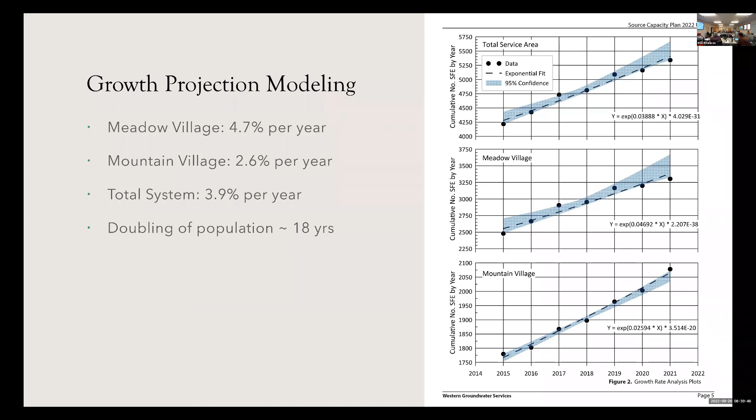There we go. So if you look at your growth projection, I just picked some 5-year increments. For the planning study, we used a 20-year period, so it went from 2022 to 2042. So at those growth rates, you're out to 12,600 SFE in 2042. That's more than a doubling of what you have today on the water side.

And the Meadow, of course, with that 4.7% growth rate, outpaces the Mountain considerably. So most of the growth would be in the Meadow. The Mountain also would see significant growth over that same time period.

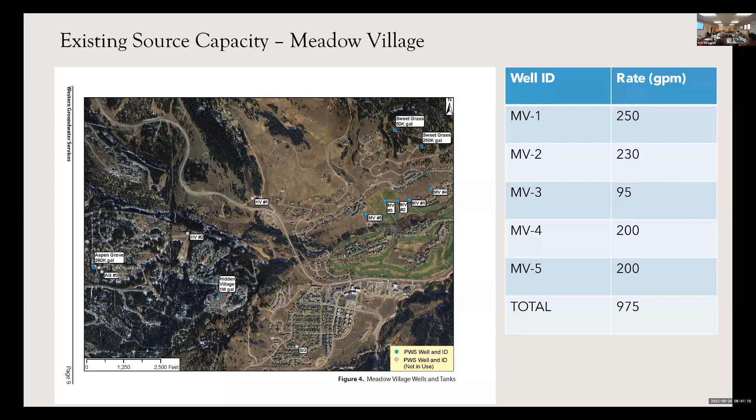In terms of supply, this is the Meadow. You've got 5 wells in the Meadow now. So 975 gallons per minute is that supply, and you might keep that number in mind as we go through. Right now you're using only about 2/3 of that supply. Your max day in 2021 was about 590. We'll go over that some more.

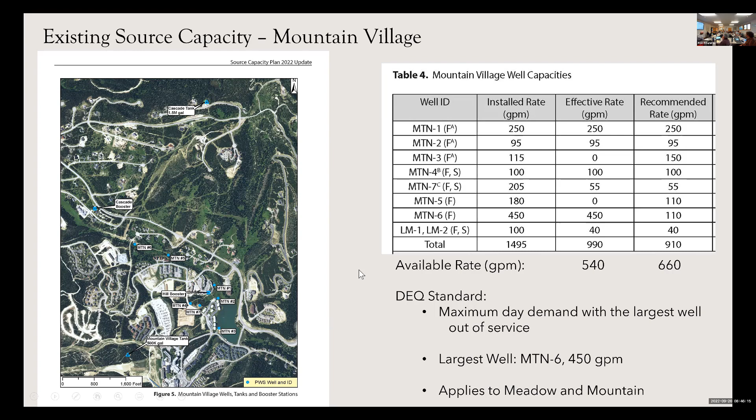Now what happens is when you treat 3, 5, and 6, because 5 and 6 can't sustain the high rates, you're not going to treat for those rates. So you're going to knock those down, and you can see I've got them at 110. Well, at that point, Mountain Well 1 becomes the largest well in the system. And so we're taking 910 gallons per minute total minus 250. That's how we get to where we get. And it still acts as the largest well down into the meadow because the meadow doesn't exceed 250. They match it. So that's kind of how that works out. And we'll talk a little bit more about 3, 5, and 6 on some subsequent slides.

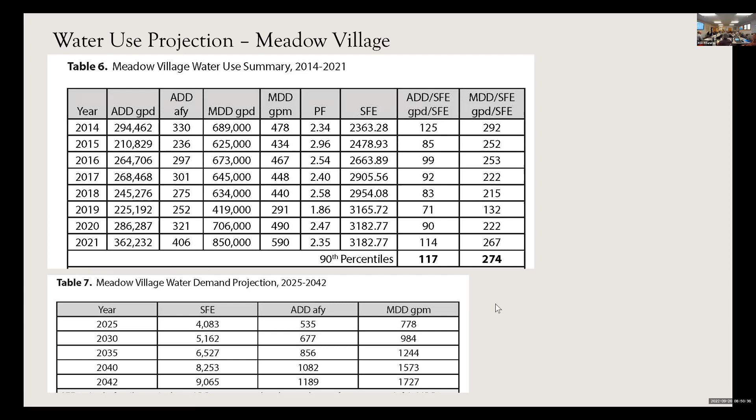Yeah, and actually, meadow, when you look at these columns here, it's fairly consistent over time. I mean, there's certainly some wiggles in there, but the numbers aren't wildly different. The mountains, they are. We'll look at those. But anyway, that's the number to remember: the 2030, 2032 horizon based on the present growth rate. That's when the meadow supply wells are going to be maxed out. But that doesn't include the subsidies that they get from the mountain. Right. So the mountain is key to subsidizing that at this point. Yeah. Okay. There's supply side.

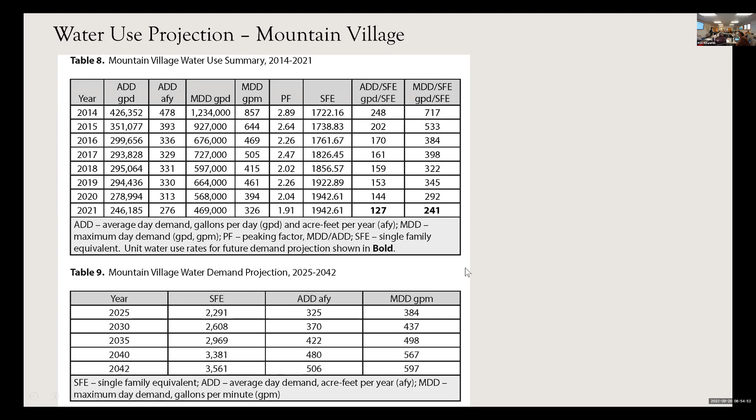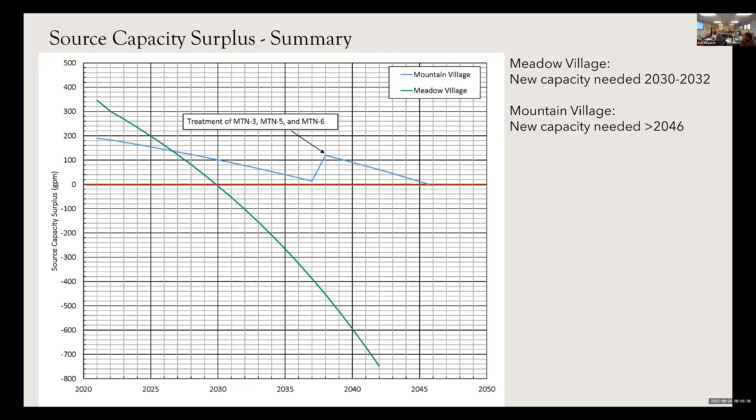On the mountain, here's your projection here. You add this new treatment in 2038, and you're good out to sometime just before 2046. That's what that plot shows. So just a summary. So Mark, real quick, you have a kind of spread out analysis over a 12-month cycle, kind of averaging over the year, but you have a prediction of in August.

Well, we work off that max day demand. I know, but we don't have a linear flow out of our system over the years, so, Jim, you could agree, but we should look at a micro month in there if you drain your tanks. No, you shouldn't. See, if you meet that max day demand, that's kind of your worst case scenario. Yeah, that's true. So you should be fine.

And the numbers I'm using, right? So on the meadow, I didn't get into this, but I had it noted on the table, I'm using the 90th percentile of the data we observed. So I'm kind of pushing you out to the high end. And then on the mountain, I did use the 2021 unit water use rates. Those were the lowest, but you may come down some more. So I think it's a reasonable way to go with that.

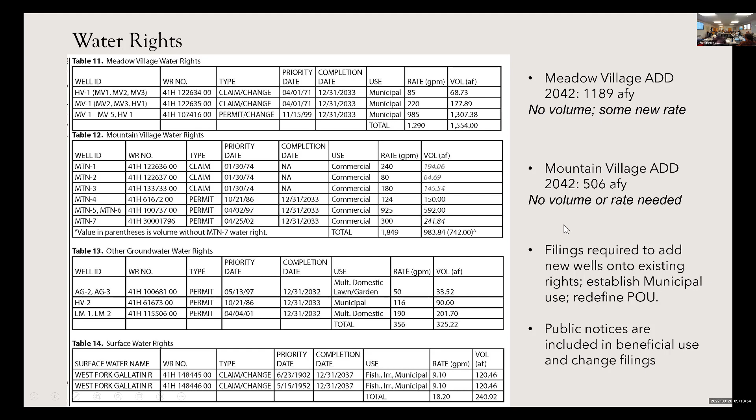So again, redefining of a term in a different arena, right? Goes back to rates, okay. Got it. Yeah, it's quite a broad definition right now. It's something like a place that's like a municipality. It's quite general. Which fit back then. Yeah. So, I've got a bullet on that coming up that would list those rights. In fact, we're here.

Okay, so. Oh, geez. Just thinking if I missed a slide. No. Okay. Well, so we came up with them. I came up with improvements.

Okay. So let me just preface this a little bit. What a lot of water systems and municipalities have moved to is integrated water resources planning. That's where you look at all your system and it's integrated, right? Conservation is one element of that. All your reuse, if you were doing reuse through the purple pipes and distributing that. Since you're not doing that, it's more on just the wastewater side. But anyway, I've got a few improvements here.

Conservation has been around for a long time. So what I did is I looked at what type of conservation would be the most useful to the district in terms of how you manage your source capacity and the longevity of what you have. I looked at Meadow Village and applied some numbers for almost a complete elimination of ornamental irrigation. And you save about 400 gallons per minute by 2042 with that. I've got another slide on that, so we'll talk more about it when that slide comes up.

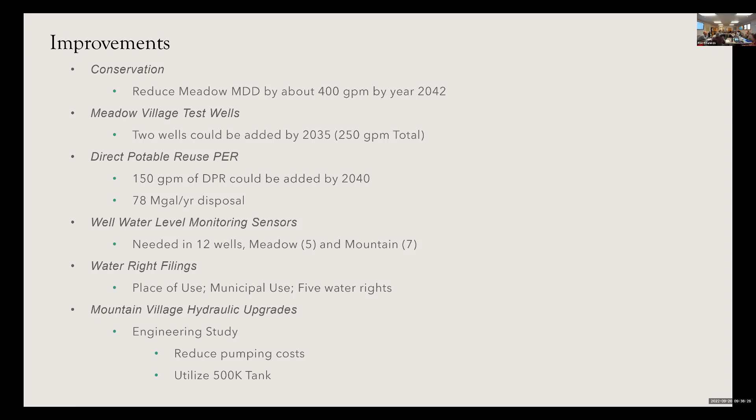Actually, the point that we of course didn't anticipate back then is we just kept going up the mountain on elevation from Montana Club. I never thought we'd go above Challenger. We did. We'd put a bathroom at the top of the tram if we had.

So here's an estimate of costs. Conservation's sort of almost free, but you're going to want to put some more thought into that. I've got a slide on it coming up, but basically those improvements I just outlined, estimated budget just under 500K. The sensors is the big one. The test wells, I have those as being done like 2025. You could defer them a little there. My thinking is find out what you got, soon, so in case you have to replan them. So it wouldn't be bad to do those sooner rather than later.

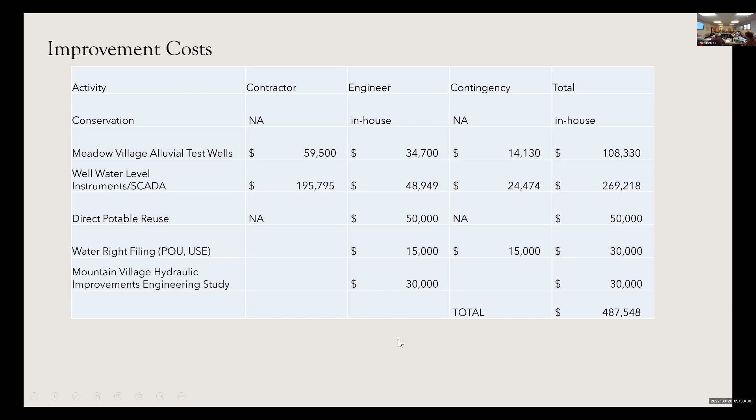But that's kind of a look at that, and that's of course in the report, or this will be an updated report. And here's just a timeline for you. Conservation, you can start it right now. The sensors, you might distribute that over a few years; I'm just showing you 2 years. The direct potable reuse, that's just an engineering report, to just move that ahead. The water right filing, you could do that next year, and then same with this engineering study. You can do that anytime and get those things to move ahead.

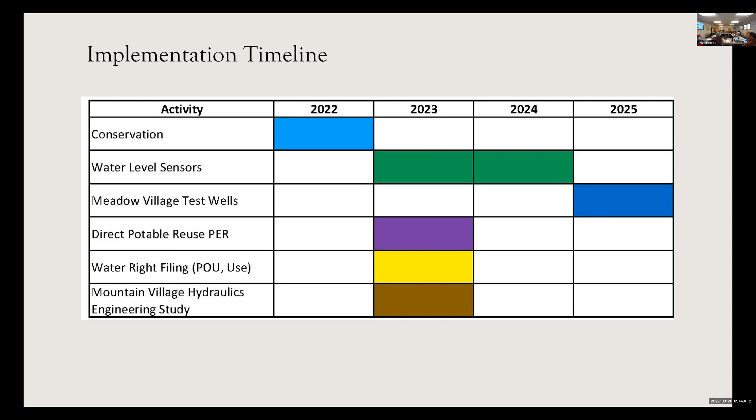So the irrigation conservation is kind of interesting. It's been around for a long time, right? Well, what I see when I look at it is these voluntary and incentive type conservation measures, rebates, et cetera, they really don't do much for your system. If you could ever get 25%, that would be great. What you see is anything from a few percent to maybe 15% participation. So if you really want to get something out of conservation, it's got to be mandatory. You won't get much out of it otherwise.

And the other thing about those voluntary programs and educational and so on is they actually take a fair amount of time, right? So you're engaged in that. The district participates with Gallatin River Task Force. They've got a nice website section on conservation, and if I understood them correctly, they got about a 2.5% participation in their program, and so mandatory is kind of the only way to really get anything to happen with conservation.

And some of the conservation literature advocates for this, 500 square feet irrigated. It can be any shape. I just show you that 22 by 22, but it's basically an elimination of almost all outdoor ornamental water. But the savings are pretty substantial. You recall that Meadow Village was about 274 gallons per day per SFE. That would drop you down to approximately 190 by my calculations. So that's something for the board to consider.

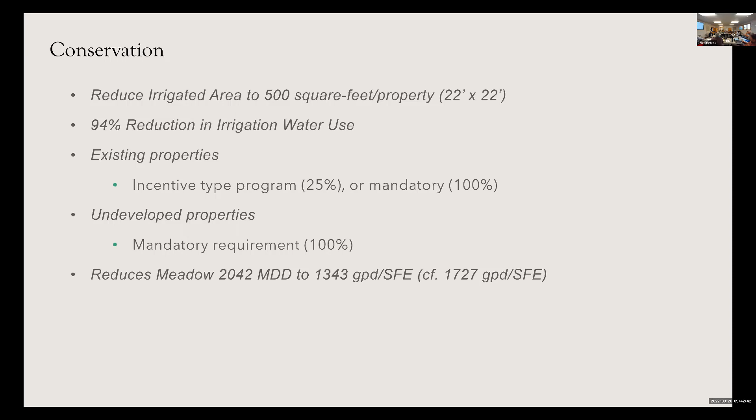And then I show you in that last bullet, that 1,727 gallons per day gets knocked down to 1,343. That's almost 400 gallons per minute. So that's a substantial capital improvement savings realized through that action. The sensors, here's just some numbers regarding that $270,000 cost. I threw Mountain Well 1 in, Meadow Well 1 in, so it's 12 wells, but there's the 8,050 feet. And of course, as Ron and Vince mentioned, there's other options out there; this is probably the status quo worst case you could come up with.

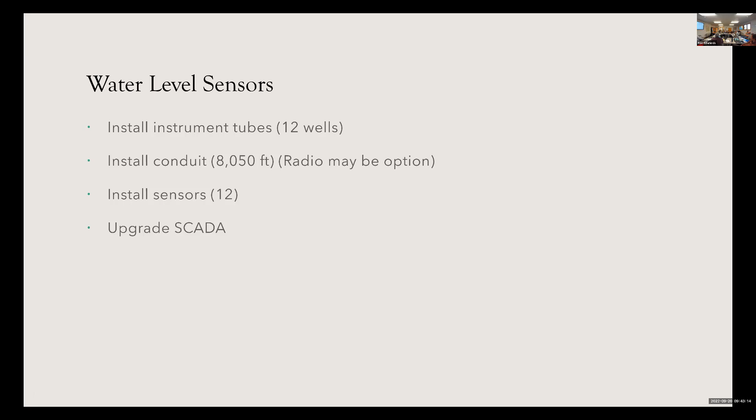Here's a plot of the test wells in Meadow Village. A little hard to see through. What I'm showing you is the colorful areas are the estimated thickness of the alluvium. So this white band here, where the existing meadow wells are, is kind of an anomalously thick section of alluvium. And so I'm showing you one of those test wells. I call it number 4 because we did test wells 1, 2, and 3 in the meadow years ago. And then here's another test well over here. Here's meadow well 4. So there's good thickness there. You're offset equivalently from the channel as the existing wells, which is important for the water right filing aspects of this. So that's where those are.

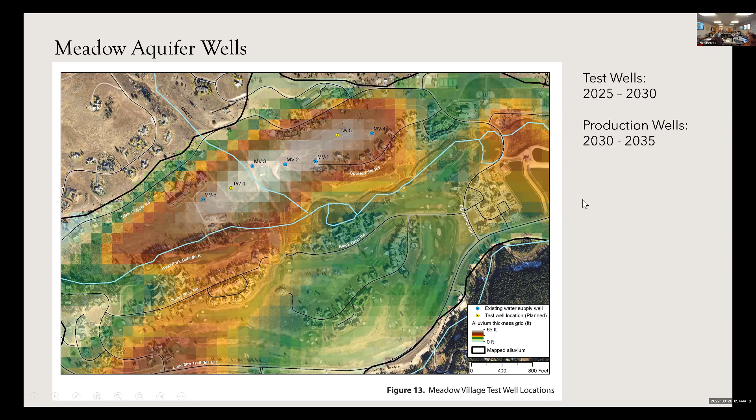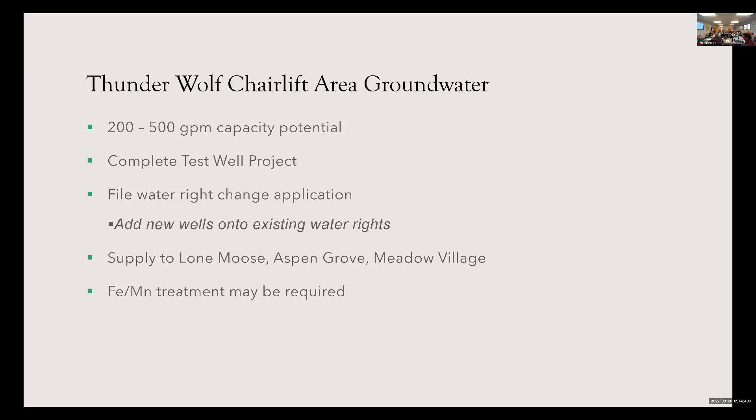The report does talk about that test well 9 that got terminated. There's certainly water at that location. The district knows about that. It's in the report. I don't have any improvements related to that. The access issue needs to be dealt with, but there is iron and manganese in that water potentially. We never got to finish that test well to see what the situation was at that particular location, but you could expect treatment requirements potentially in that area. But it appears to be significant capacity there.

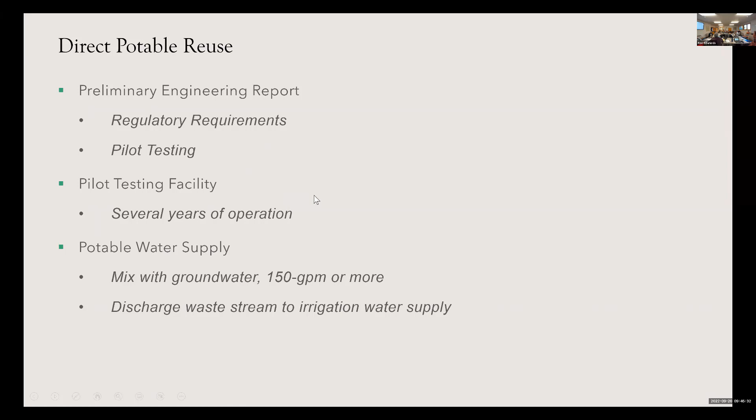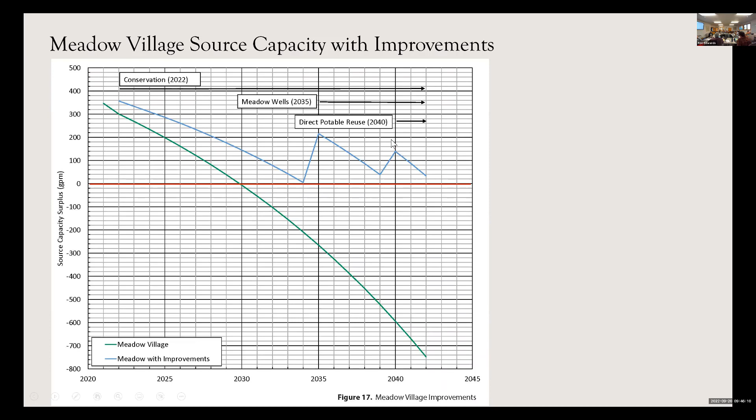Direct potable reuse: all the plan is showing now is an improvement to look at it, to start the process and see if you have favorable conditions, to see if this becomes a viable option for the district. Here's kind of how the meadow responds to this. This graphic is in the report. So here's our surplus. The green line's the same green line I showed for the meadow earlier. So conservation gets you out 4 years or so. Then you add those meadow wells, that takes you out to year 2040, and then in 2040 you could bring in the direct potable. I'm not showing what happens with the Thunderwolf chairlift groundwater, but that's got potential there.

Here's just some more details on that water right filing. I think we pretty well covered that, but it would be these 5 water rights that you could file that change on. I think we should do that no matter what, right? Yeah.

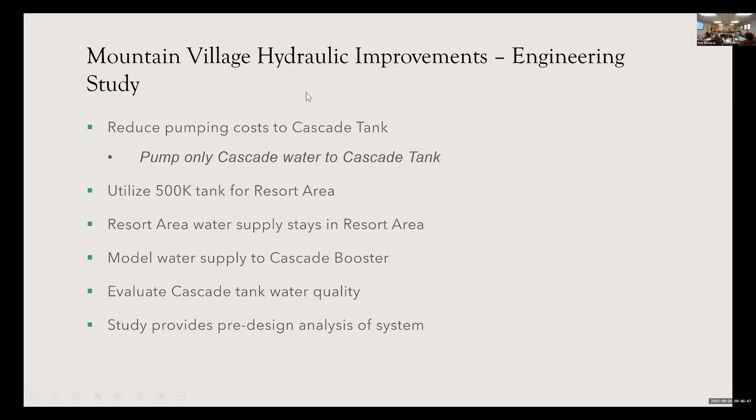And lastly, we've kind of talked about all the details of this, but this is again an engineering study to look at taking care of that pumping issue in Mountain Village. So that's it. Thank you, Mark. Yeah, thanks, Mark.

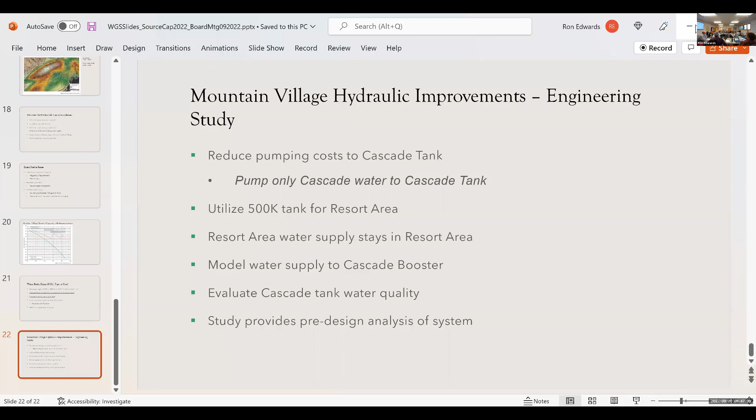Jim, do you agree with all that? Yeah, I open the numbers and the times, and we got that much time, that's for sure. I still can't explain why we're using so much less water, but it's a good thing, no problem with that. But obviously our rate has changed. There's a lot of factors into it. We've done everything we can to verify that data.

It's pretty great. Yeah, we actually put a portable meter on Cascade, ran it for a week and it actually came out consistent. There wasn't a real bias. Obviously we've been doing leak detection, we've done hill condos. I know nothing more than pat myself on the back and the crew, but it is surprising to me also. It's a good surprise.

So Mark's advocating conservation basically starting right away. So what's our first step to that? Is it study, subcommittee, recommendations? Yes. I think conservation is pretty well spelled out. We either mandate it or we keep doing voluntary. Or you raise rates, or punitive damages, yes. So if we go mandatory, then we have to have some type of whole guidelines. A whole other division of this company. Well, you work with the SOA on that, and I guess other HOAs.

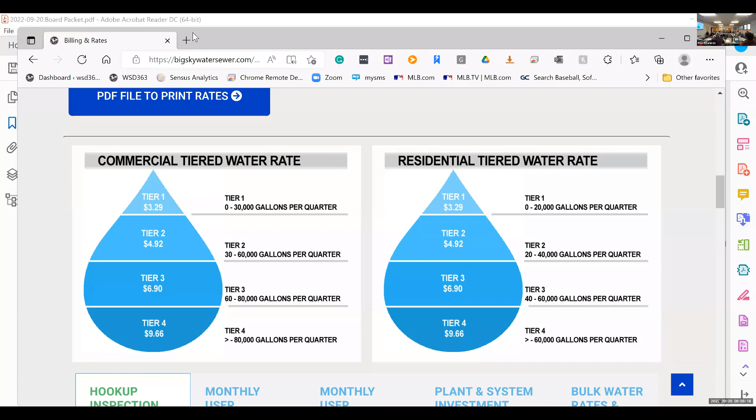All right. Well, Scott, have you guys worked on some conservation plans like this? Maybe throw something our way that you think would be applicable, at least a framework. Yeah, one thing that comes to mind is that you can cut supplies off if you have severe drought. And the turf goes brown, that incentivizes people to wake up and say, hey, if my lawn's gonna be brown and you're offering me a turf rebate program, I'll clear out the turf. And then you highlight somebody's landscaping as the showcase. Really pat the people on the back that are doing what you want. All right, anything else?

Thanks, Mark. That was great. It's good to have you. All right.